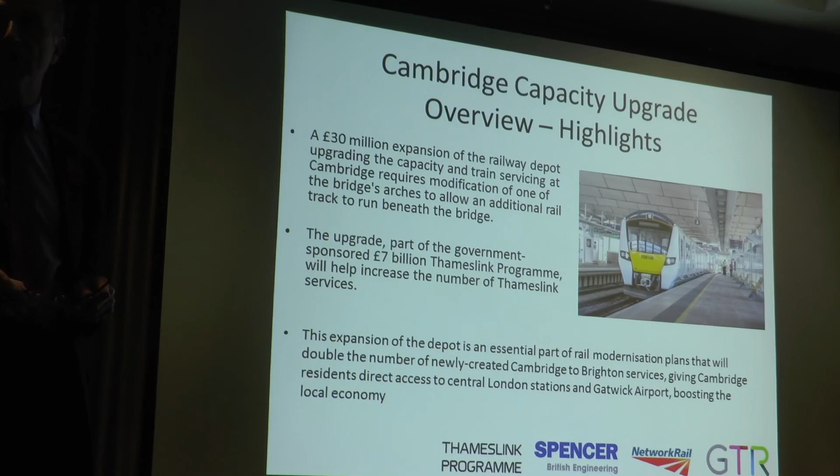The Thameslink Programme has been on the go for 10 years or more. We're nearly at the end, but one of the last but not least items is the enhancement and modification to Cambridge sidings to the east of the city station. It is almost a £7 billion upgrade in all. It's not just infrastructure works like Cambridge is - it's 115 new trains of 8-car or 12-car formation, and changes to the whole franchising regime to enable the best possible offer to be made, both in franchise terms and in train service terms.

So homing in on Cambridge, this is very much about the most efficient use of the sidings area, which to the south of Mill Road Bridge has been brownfield for quite a number of years, and we're proposing, and indeed have already started through works, to enhance and add to sidings down there. And then, because at the moment all the movements between the north and south of the bridge have to go out onto the main line, Network Rail infrastructure, and therefore has a risk of delay and perturbation, the actual reason why we're coming on to the 8-week closure is to enable a new through road on Mill Road, under Mill Road Bridge, to stop that encroaching on the main line and be much more efficient, both in terms of train movements and for washing the trains and emptying the trains' toilets.

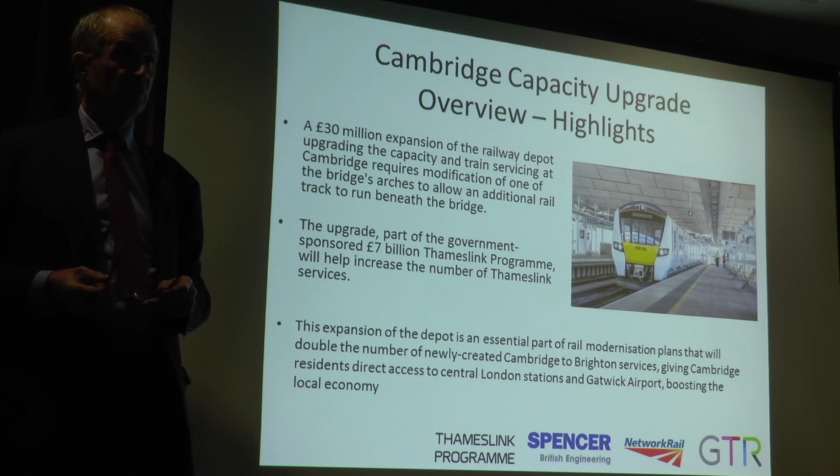So it's an absolute essential part of the Thameslink Programme that this depot is enhanced as well as modified, because you will then get the service reliability, as Cambridge is having an increased number of services through central London to Brighton and Horsham, opening up a much bigger geographical horizon than has existed hitherto.

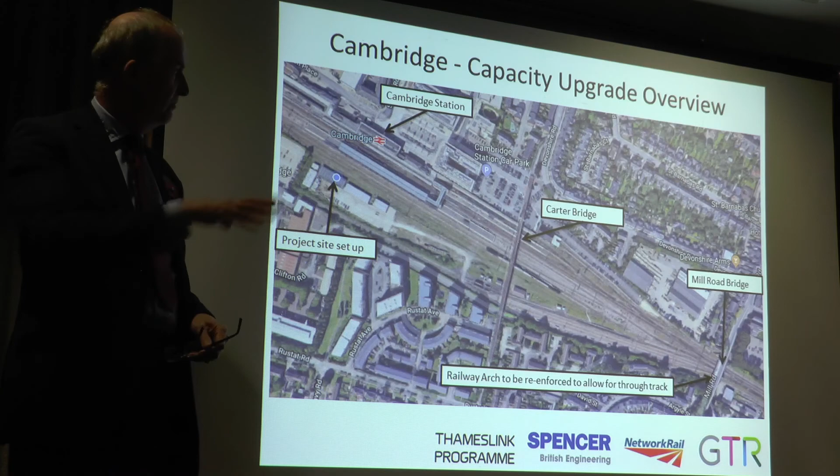I think you all know where we're talking about, and how it fits into context about Cambridge overall, but we just thought we'd show that slide in case anybody wants to reorientate themselves.

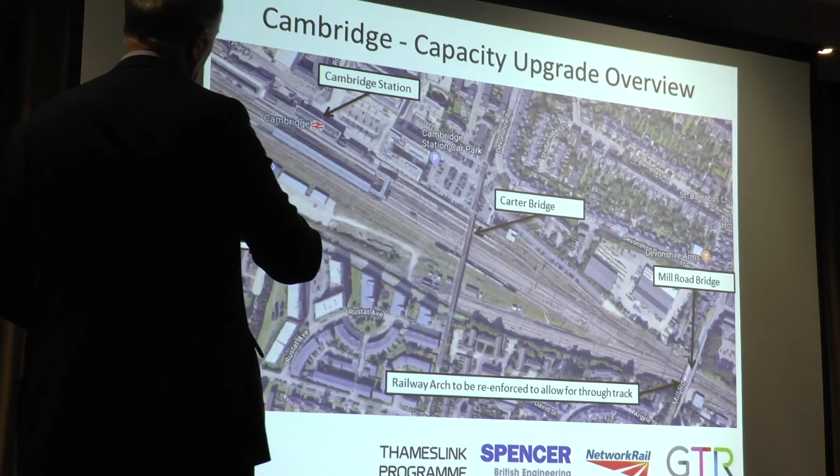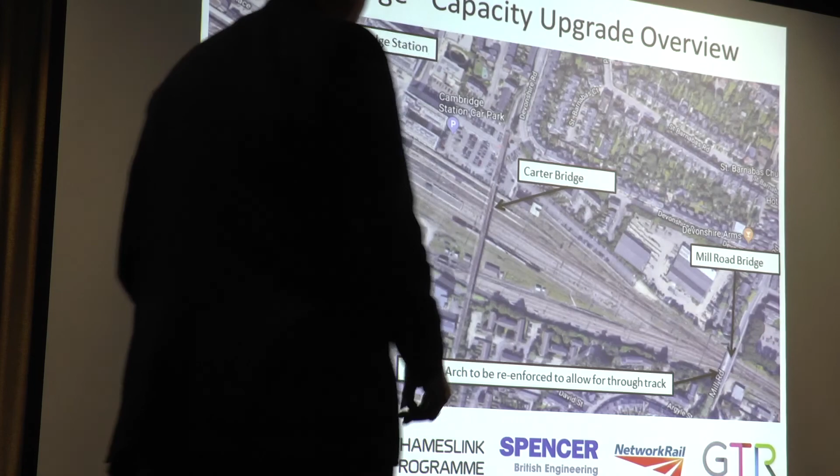So the footprint we are working on is down at Mill Road, at the south of the site adjacent to the post office building. We're going through the bridge and modifying and enhancing the train layout and track layout north of the bridge. But I won't bore you with the full details.

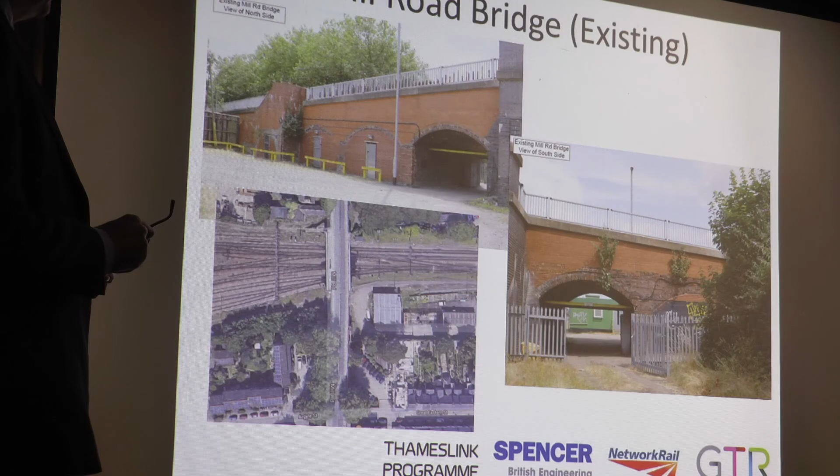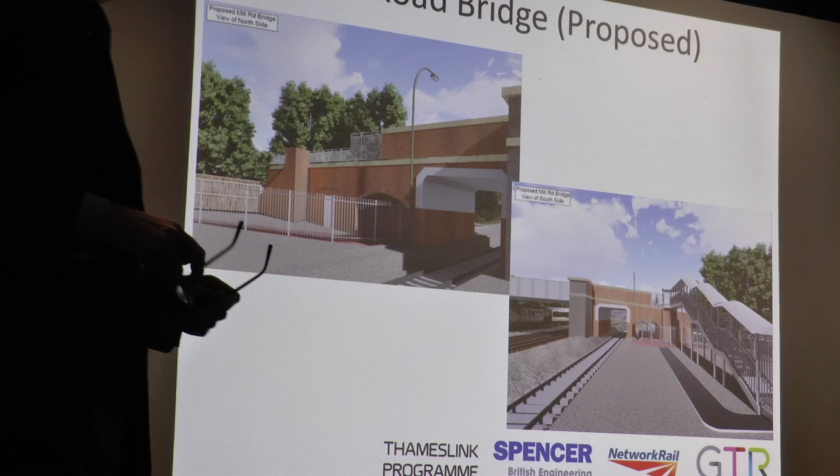So that just homes in on what the work zone will be. Proposed closure dates up there: 13th of May to the 8th of July next year.

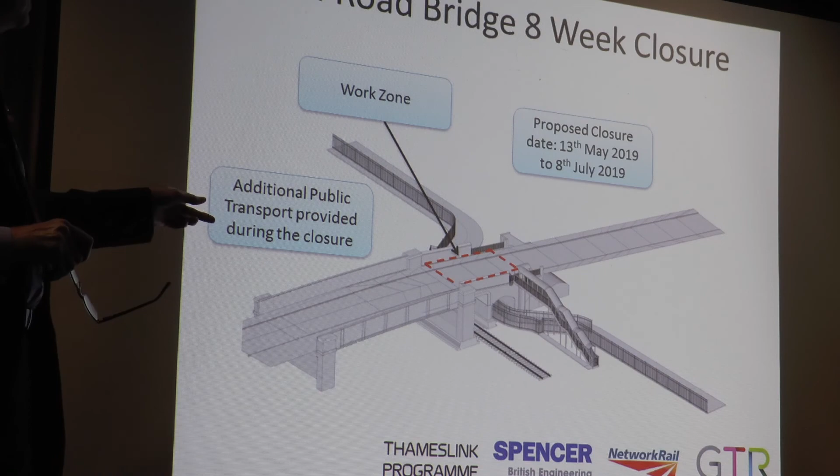We've already been in discussion with public transport operators. There will be additional buses provided each day for those that require them and would be very inconvenienced without them. We're also in discussions with a number of other bodies, be that taxis, be that bus operators, and we will work through that with them in order to minimise the inconvenience.

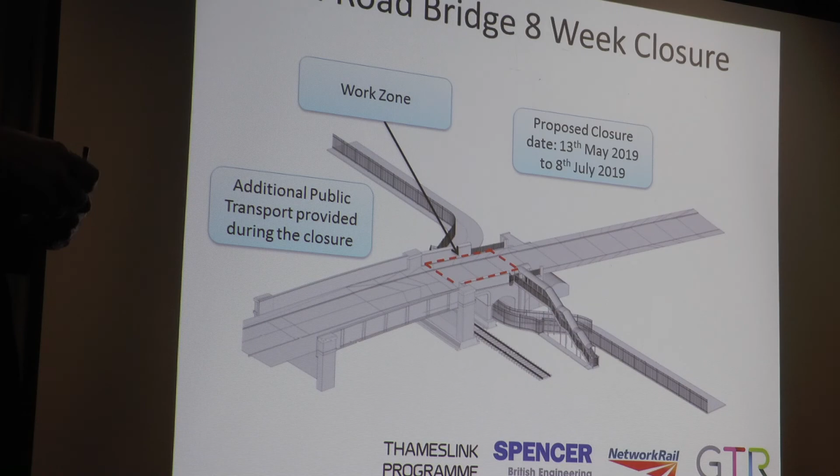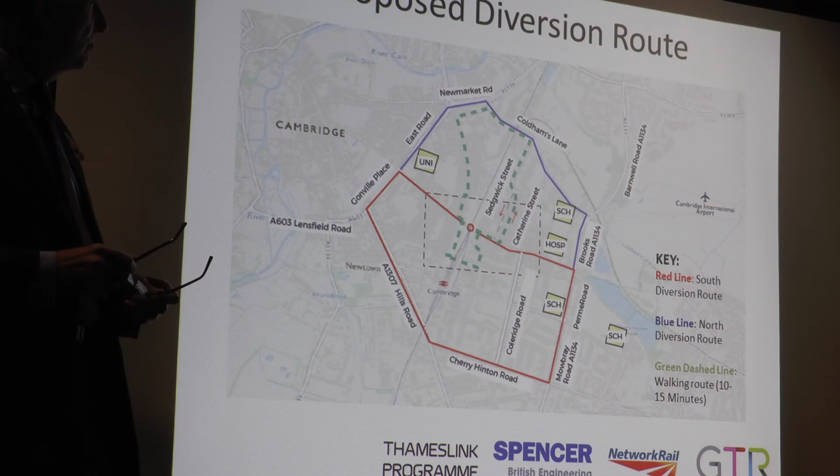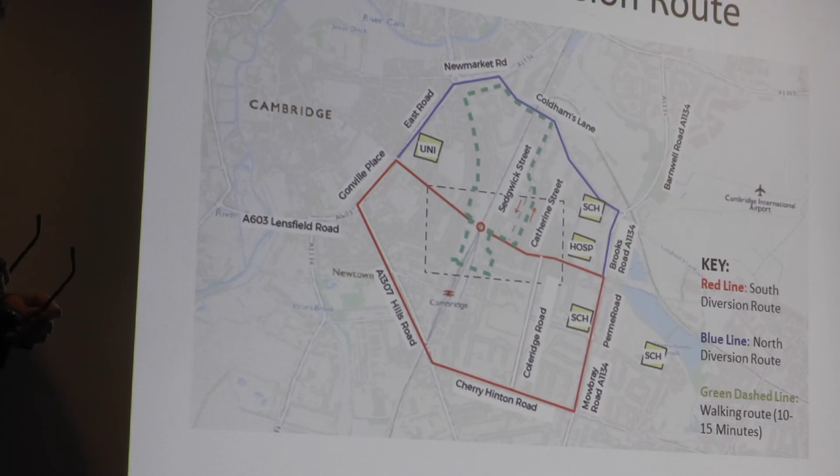We've already mapped out what we think is the optimum routes for vehicular diversions north and south of the bridge, and for cycling and pedestrian diversions north and south of the bridge. So we're open to suggestions if there are more optimum routes that can be taken.

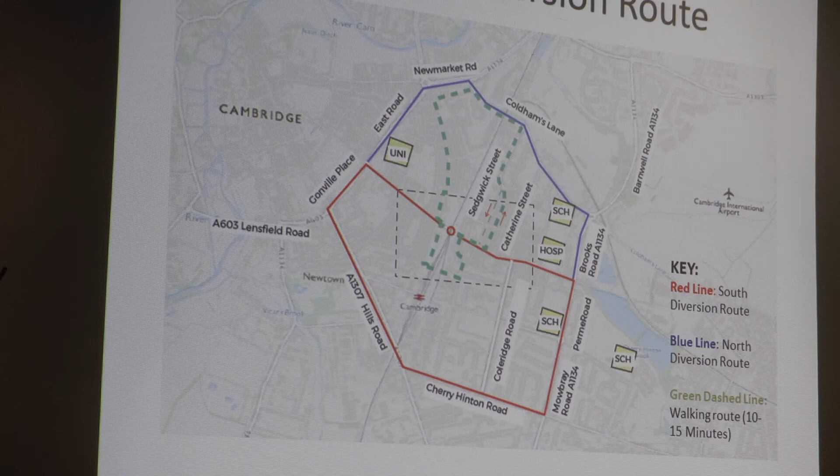And we estimate, and again we'll be corrected by you if we're wrong, that the walking route additional time will be 10 to 15 minutes during the closure period.

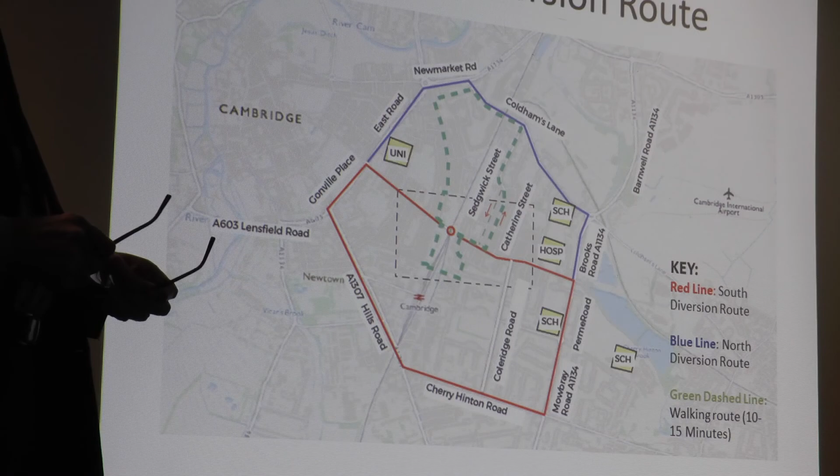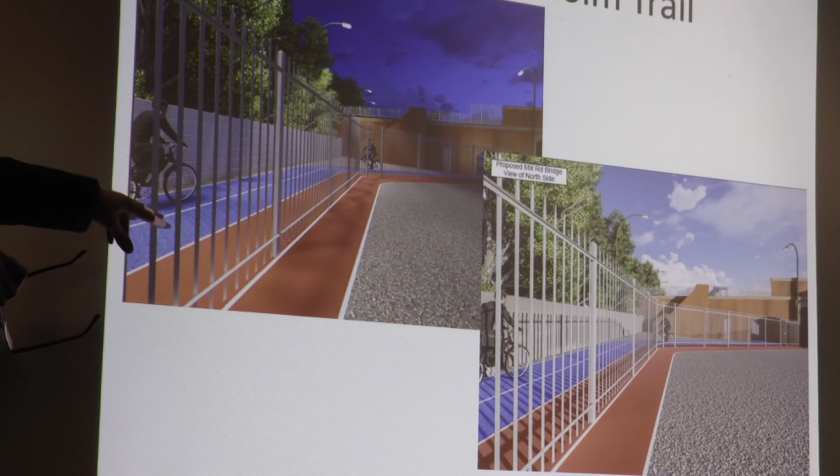Just some computer generated images of how integration of the Chisholm Trail and pedestrian access on that side, the left of the palisade fencing, with the driver's walking route that we're proposing on the right hand side, how that could work.

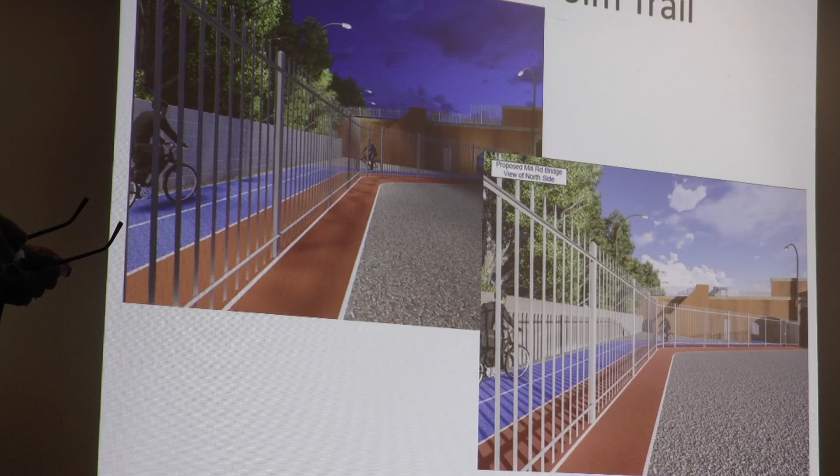So we're very much making provision for the Chisholm Trail in terms of what the council and a lot of the community in this part of the world want.

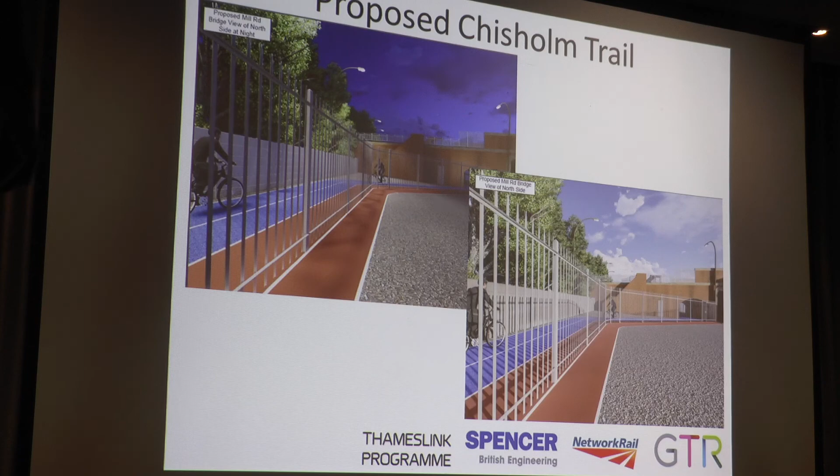So, the stakeholder plan that we have devised: here we are tonight, and we will have further meetings as and when required. That is a commitment from us.

We are going to post leaflets through doors to households within a 1 mile radius, at least bi-monthly. So week after next is the first leaflet drop. Regular updates as we head up to the works, and most importantly to tell you at the end that the works are complete, and that's us out of here, as it were.

We'll have regular updates as well to key stakeholders, be it schools, nurseries, public services, and we will be able to respond to individual comments, and that includes any issues we can't resolve tonight, through the Thameslink programme and the generic email address that I will put up shortly.